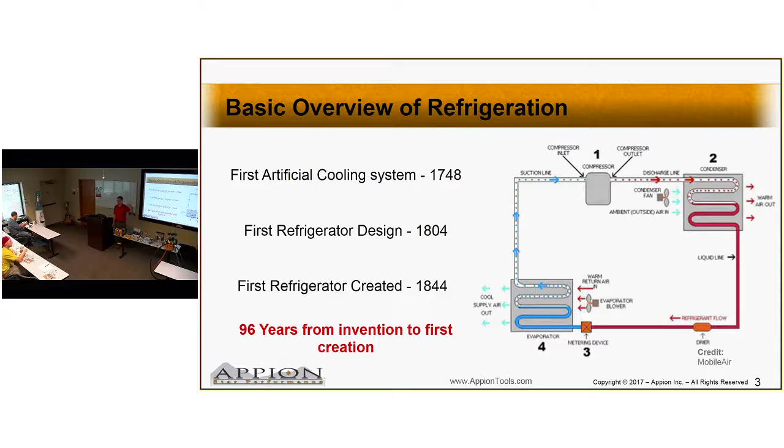So, are you guys familiar with the R22 phase out? CFCs, HCFCs, you guys heard one or two things about this, it's been in the news, the president used to talk about it. You guys buying R22? By the pallet. How much is it, $700 a jug? There are areas, California, that will be over $1,000. They were already $1,000 this year. With the phase out, it's going to become harder and harder to get.

We need to be familiar with this, but you guys are pretty familiar with this already, right? So we can skip this. Yeah, so we'll jump right into it now.

All right, so we always start with, why do we recover? What are the three primary reasons? Not producing it anymore. Required by law, there we go. I believe in giving answers, so you guys can shout out the answers. It is required by law, the Montreal Protocol. We all have our 608s.

Did you guys hear about the guy two years ago now? Got 31 months in federal prison for venting refrigerant, $10,000 fine, 31 months federal. It's a federal crime. It wasn't about how much — it was the fact that he decided to cut a line on top of the roof in front of five police officers. That's something not recommended. That is a true story, it was in the ACHR News.

Yes, it is illegal because we know about that — second reason?

There we go, you can say it louder. Say it again. Environmental, yeah, we're all about the ozone depletion. You can't read it? We'll read it for you. Don't worry, we'll have the rest of it right.

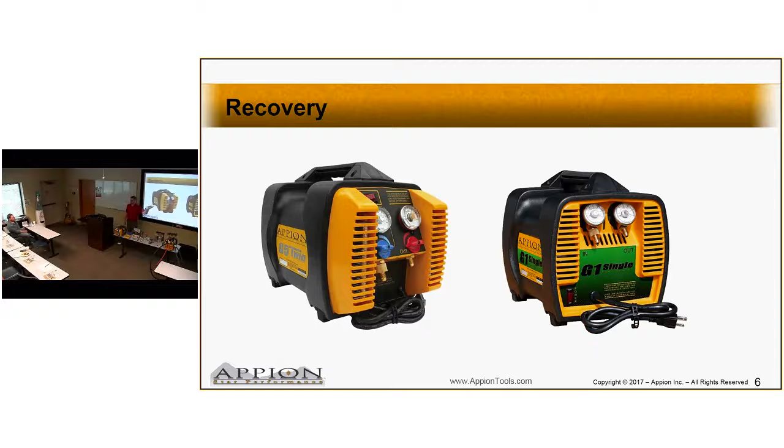This is the last time I'll ever mention the G1 single because it has no bearing on you guys whatsoever. Personally, I don't even like talking about it because it is about a quarter the speed of the G5 now. So it is green, but that's about all I'll say about it.

All right, so when it comes to recovery, how long does it take to recover a job? And it's the correct answer, right? I always get worried and say, oh, I can recover a job in an hour, right? Every job, no matter what? You guys ever talk to guys like that? So, somebody has, all right.

So when it comes to recovery, everything is dictated by this equation. This is called the mass flow rate equation. When we optimize the mass flow rate equation, we can maximize the speed of the recovery on a job. So all this means is it's the density of the refrigerant that we're recovering times the cross-sectional area of the hose, and the velocity at which the machine allows us to pump it.

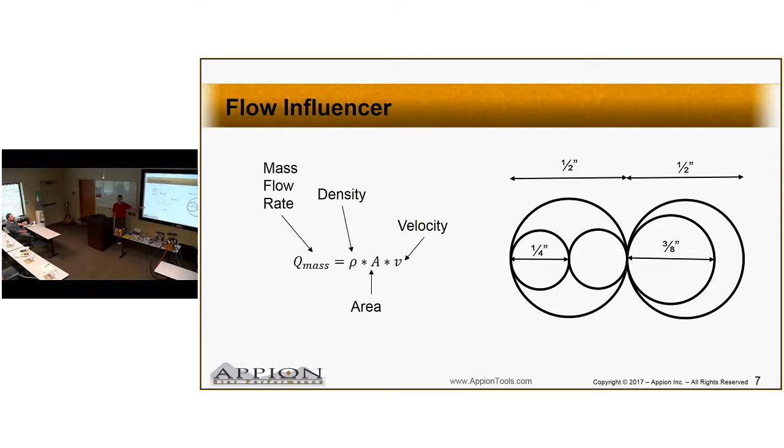Right? Makes sense? We're all familiar with the cross-sectional area, and this is just to help you guys jog your memory. So we're going to walk through this equation, and we maximize this equation to maximize the speed overall. That's the way we can best practice recovering refrigerant as fast as possible.

So we'll start with density, we'll walk through this one at a time. Liquid refrigerant R410A is anywhere between 100 to 300 times more dense than vapor refrigerant. For R410A, we're looking at a difference between 64 pounds per cubic foot and 0.2 pounds per cubic foot. So if you can recover 1 cubic foot, would you rather recover liquid or vapor? Why? Because we can move more of it at once, right?

So right now, are you guys recovering refrigerant in liquid phase?

Nope, machine's perfect, no issues whatsoever. You guys ever blown the output gauge? Yeah, but you guys have newer machines. Ever heard that the fan would fail? That's kind of the older ones would do that. Yeah, fan would fail. You guys ever notice the tanks get really hot during recovery?

Those are all directly related to each other. Those are the most common issues we run into during the recovery process of the G5 because we're going so fast. What it comes down to is when you have all those things happen, or just one of them, it's an indication you have an input or output restriction, and you're no longer pumping liquid refrigerant in any way, shape, or form.

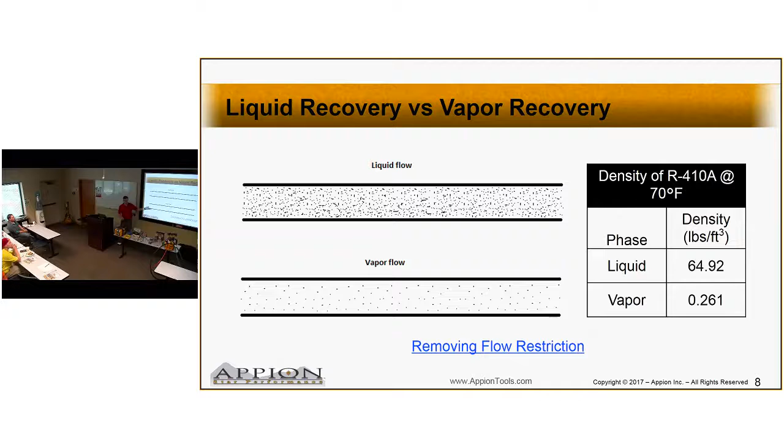So if we're pumping vapor, it's going to slow down the recovery process. But not just that, when you're pumping, what's this? Service valve. So when you guys go on a job, when there's a service valve, I know there's not always one, do you take out your cores before recovery? Yes.

Right now we're looking at about 80% of contractors nationwide do not ever remove their valve cores, ever. They don't remove them for recovery, they don't remove them for evacuation, they don't even remove them for brazing. The number of jobs we've gone on with contractors across the country, we've tried to take out the valve core and found out it's melted in place because it was brazed in.

Yeah, it should be ridiculous, right? But when it comes to recovery, you try to pump through this right here. This is now a fixed orifice expansion device, right? How do you make liquid turn to vapor?

More pressure, more temperature. We all know PV=NRT, right? More pressure means more temperature, more temperature means more pressure. We're going to add more and more refrigerant on top of it, adding more pressure, more temperature, right? These gauges are rated to 700 psi.

We've actually removed a lot of restrictions. We did a test, pumping R410A or high pressure refrigerants through this, not taking this out, with the 80 degrees superheat, we've actually measured up to a 3,000 psi spike internally on the machine. Because it's pumping superheated vapor against itself, it's pushing against the machine, slowing down the recovery process, and damaging your output gauge because they're 700 psi rated. 3,000 psi is not going to be good on a 700 psi machine, right?

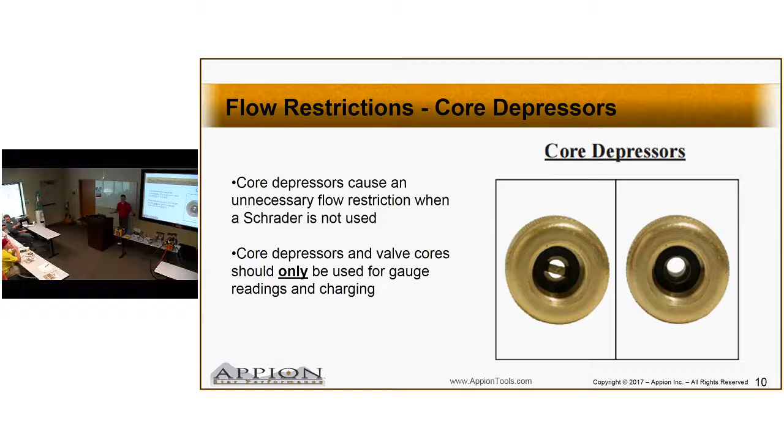You can evacuate a hose real fast. That's what I'll tell you right now. All right, not that hard. So what size hoses are you using when you recover?

Quarter-inch. Right now, about 80% of contractors nationwide use quarter-inch hoses. Quarter-inch hoses, more often than not, will have something on the side of it that starts with a C. You know what that is? It's what describes the hose.

Charging, right? They're all called charging hoses. Quarter-inch hoses are designed for one thing only. What is that? Charging, right. A quarter-inch hose is a capillary tube. Capillary tube is actually an expansion device. They're not nearly as pronounced as the Schrader core left in, but they still are an expansion device. They're designed to resist and regulate flow during charging.

Do we want to resist and regulate flow during recovery? No, right? We want to have maximum flow. So we know by that equation, a larger cross-sectional area should increase our flow, right? However, we have our half-inch hoses here. The half-inch hose is actually slower than a 3/8 hose during recovery.

It won't get any faster. So we do get a slight restriction in flow with the 1/4-inch fittings. We have the 1/4-inch fittings because it's more or less industry standard. However, when we think that you don't get any benefit from it because there's 1/4-inch fittings, that's because as humans we're used to dealing with one fluid more than any other.

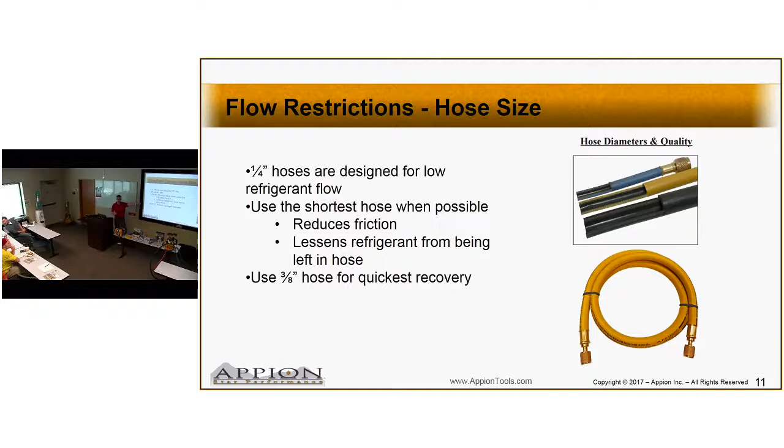We can get into the dark, dirty word of push-pull here in a second.

February 2016, we got reevaluated by UL. For our 410A systems, we can pump at 17.2 pounds per minute direct liquid rate. We talked about how we want the machine to have liquid - if we move liquid, we move liquid faster, right? Are you guys currently getting that type of speed?

Maybe, since we have the G5 twin. But that's for liquid - if we're not pumping liquid, you're not getting that speed. Vapor, more or less, doesn't change too much because we're limited by the density of the vapor. We can do liquid, we can do vapor. Have you guys ever heard that recovery machines can't pump liquid?

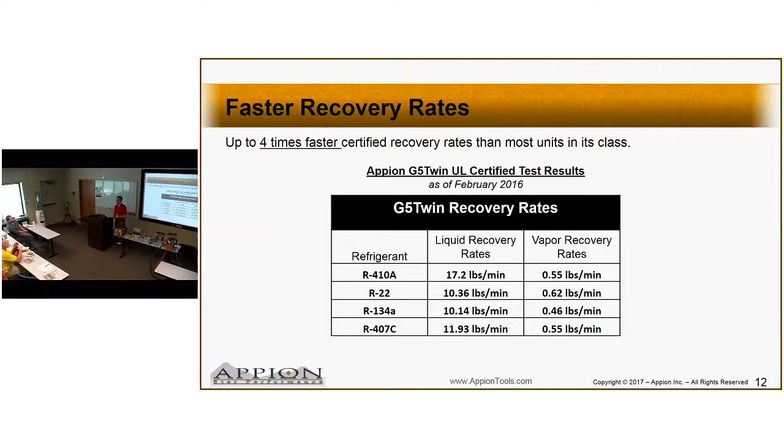It's in textbooks sometimes - some teachers will train it that way. Well, what it comes down to is the original design. Our founder was also the founder of what's called Promax, or what used to be called Promax. I don't know if they're still around. You guys know what Promax is - the blue machines for recovery? They were the first portable recovery machine that didn't blow up.

There's a fun story behind that one. I'll tell you that later.

So have you guys ever used the ones before they were portable, or ever seen one in a museum? Some shops still have one floating around - about 350 pounds on a cart. You guys ever seen one of those? Yours didn't have a cart - you had to have 5 guys lift it up. How do you get that on top of the roof?

How do you get a 350-pound machine on top of the roof? Apprentices, cranes, a lot of guys will say a 600-foot hose. We know that's going to be a little slow, right? So we know that if the machine's not portable - and that's probably the correct answer, sadly - people aren't going to recover. They're going to skip the job because it's too much effort. We're not going to do it. So we had to make the machine portable. Where's most of the weight on a recovery machine?

The motor's the largest weight, so to get it portable, we had to put a smaller horsepower motor in it. How do you design for a smaller horsepower motor?

You make it do less work, right? So originally, the design that he made was to fill the crankcase with the refrigerant. The refrigerant's now going to have a positive pressure on the backside. That's going to build up to allow a pressure differential across the piston, which means we have a smaller horsepower motor because it has to do less work, since we're using the refrigerant to pump forwards. We're allowing the machine to be smaller because we load the work by making refrigerant work for us.

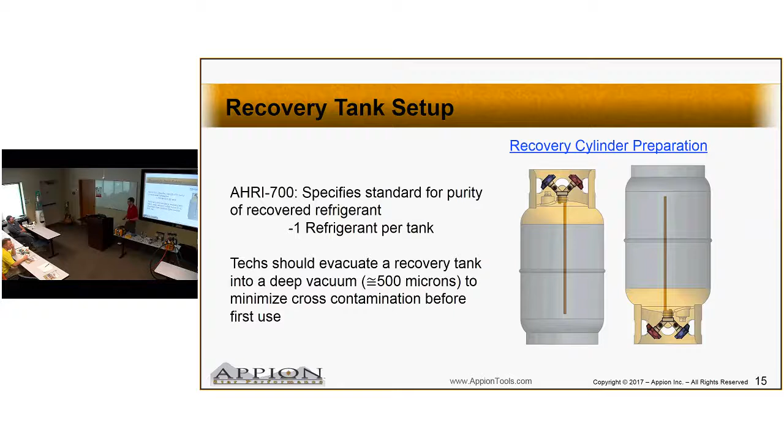So this is what's called our manifold-less recovery technique. This is - we're going to show... wow, brings me back to the 1990s.

Alright, so we say we do not recommend manifolds, right? Because they increase head pressure. So how do you get from both sides of the system at the same time? So what was on the side of the valve core tool? There's a valve core in there, right? What do you think you can use to remove that valve core? Another valve core remover tool, right?

So this technique uses 3 valve core tools, 2 4-foot hoses, and 1 6-foot hose. What it's designed to do is minimize the restrictions to maximize your recovery technique. Again, we're talking about small systems - the idea can be transferred over later.

So what we found is you hook up your liquid straight to core, core out. You're going to have your 6-foot hose strung from your liquid straight to the input of your machine. You're going to have another core tool - it's going to bridge from there, right? You're going to blank it off from the liquid. A 4-foot hose then bridges to your vapor port with the core removed, obviously, and then you can put your compound gauge directly onto the side of your vapor port.

Have these ones purged and closed. You always want to have all your hoses purged before you recover.

You're going to start recovering your liquid first. You're going to watch your scale and your compound gauge. Once you start pumping vapor, it is noticeably slower, right? We know that we're going 17 pounds per minute and we're seeing it just stream right by, and all of a sudden it's getting, we're going 1 pound, 2 pound, 3 pound, 1.1, 1.2, right? It's usually that pronounced. Time to switch over to the vapor side.

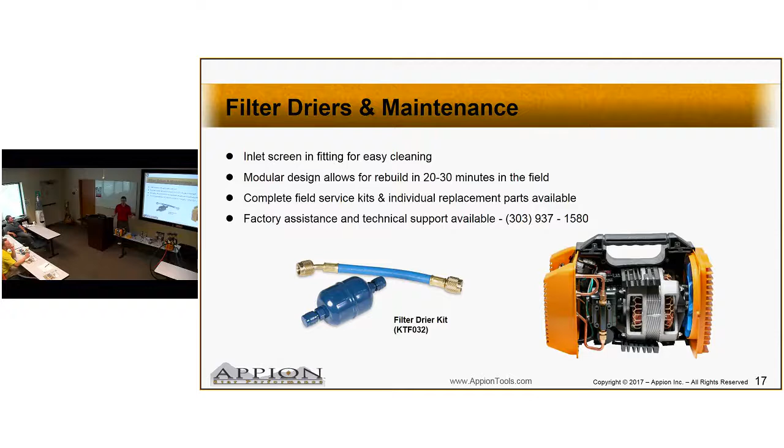So yes, you can fully field-service a G5 Twin in about 20 to 30 minutes. What it ends up being is the only thing that really gets worn out are these O-rings and seals. O-rings and seals are usually designed to eventually wear out. Usually we see between 5 to 10 years with filter drier use and constant best practice. These can go without being replaced.

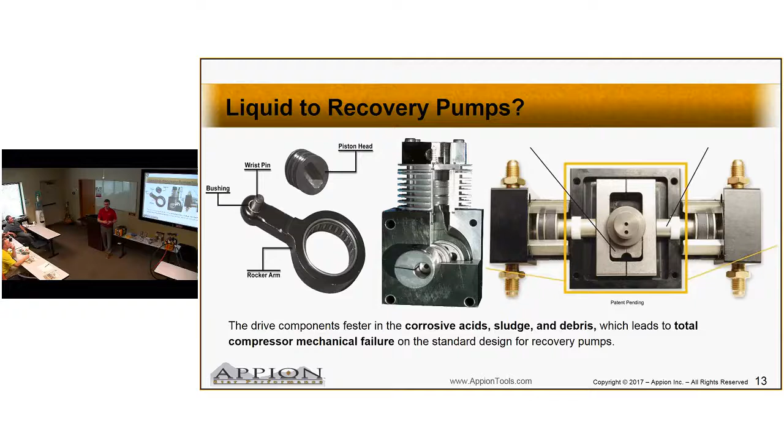What happens if you're doing a unit and it has a little piece of copper in it that nicks your seal? It's not going to seal very well, right? It's been damaged, that's when you replace the seal. You're just replacing these two seals, this is completely isolated, you're not worried about that. And these two seals, how long did it take you to do the first one, Jim? An hour and a half. Jim's slower on the screwdrivers. Usually we're talking about 45 minutes for your first one, and you do it once. Who's got the cutaway? You open it up, that's what you see, you won't ever see that center part. It falls apart real easy, or takes apart real easy.

Anyway, do you guys have any questions? Made sense? Yes. Yeah, perfect.

So we have two options here. I can either show you guys real fast how to do a bench test to see whether or not you need to repair your machine, or just jump right into vacuum. I'd say do a bench test.

All right, so we have an extension cord right here. Everyone come on up, we'll do this real fast, get you guys moving, get that chicken up and around. I need more chicken. I know. Yeah.

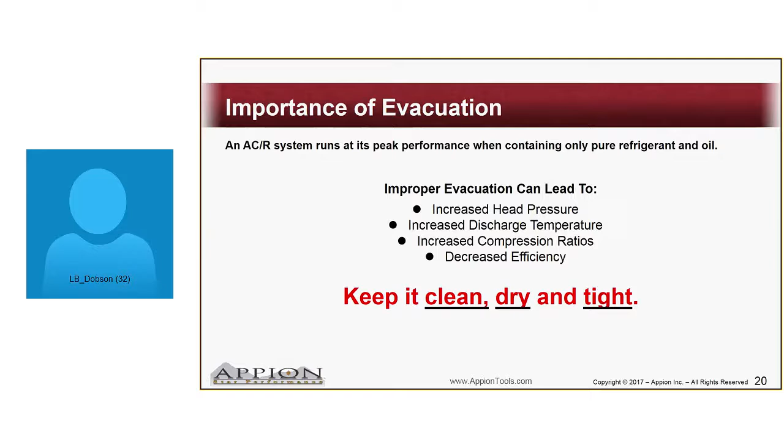Depends, right? The answer is always it depends. Why do we evacuate a system? Because the government told me to, right? What happens when we don't evacuate a system? Work back for free.

Exactly, yeah. So if we don't evacuate a system, we're going to leave condensables in the system, non-condensables. Non-condensables is going to increase your head pressure, discharge temperature, blah blah blah, right? We can all read. What happens when you leave something called moisture in there?

Right, you're going to build acid up and all that stuff. So they did a test - the Department of Energy did a test where they didn't evacuate a system and charged it fully correctly. They found that if you didn't evacuate a system from atmosphere at standard conditions, you had an average of a 15% energy drop of a system. 15%. They added 20 psi of nitrogen in the system, a non-condensable, and they found that it had a 45% drop in energy efficiency.

Now you should not have 20 psi of nitrogen ever in a system when you start evacuating, but it does go to show - if you're trying to compress a non-condensable into a liquid, as we know it's non-condensable, it's going to drop the efficiency of that system. You're going to have an angry homeowner because it's now costing them more to operate, right?

So evacuation is degassing and dehydrating. So you're removing non-condensables and moisture from a system before we put refrigerant in.

You guys ever deal with pinhole leaks? One or two, right? Go to a system, where's it losing refrigerant from? Okay, usually pinhole leaks. You guys ever put a hard start kit on a compressor? You guys ever had a failed compressor? Why do those happen? Guesses? They're usually related.

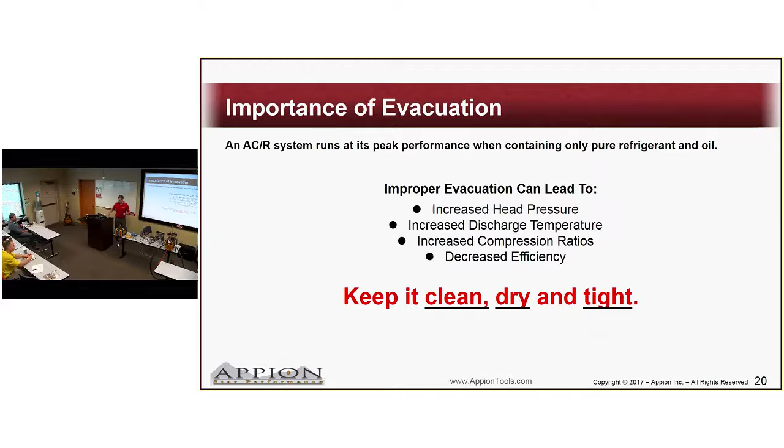So what happens when you don't remove all the moisture from the system? Someone said it earlier - acid, right? Moisture plus refrigerant will either make you hydrochloric or hydrofluoric acid, depending on the type of refrigerant we're dealing with. At standard conditions, 50 feet of quarter-inch copper line will have about half a cup of water in it. Is that enough moisture, do you think, to make some acid? Sure. Where are these pinhole leaks coming from?

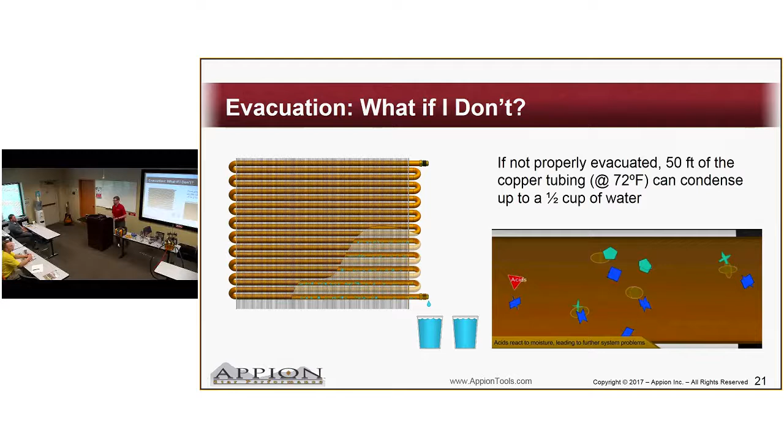We have hydrochloric acid running around in a cycle, corroding away the copper on the line, which eventually is going to make it so thin that you have a small leak that develops, right? Pinhole leak. Where's the copper going to go? It goes to this system and gets deposited on the hottest part of the system, the crankcase of the compressor. You guys ever taken apart a failed compressor?

More often than not, you see a lot of copper in there. There's not supposed to be any copper in here. What happens is with moisture in the system, you make acid. The acid is going to strip away the copper. Pinhole leaks develop, and the copper is going to go around the system and get deposited on the crankcase of the compressor. As it's cycling through, it's going to build up more and more copper. Eventually, it's going to start seizing up on you. That's where we put the hard start kit in. A hard start kit usually does an extra little kick for us to break that initial friction that we've developed because now we've had less tolerance due to the copper buildup. Make sense? That's eventually why we need it.

You guys ever heard that moisture will freeze and clog the TXV valve with ice crystals? Well, that's not true. Some people out there think refrigerant makes things cold, therefore if you put moisture in it, you make ice crystals. Not true. You make acid instead. The acid will actually destroy the oil, the POE oils, whatever you might have in there, which makes sludge, and that's what ends up clogging up your TXV valves.

You guys ever seen the failed TXVs, TEVs? Even fixed orifices, they have all that stuff in it. That's usually the sludge that's developed from the acid. The acid is coming from the moisture left in the system, and the system is operating at less efficiency. It's going to break, and we're going to get an angry callback sometimes, depending on how much moisture, how much humidity is outside, all that stuff.

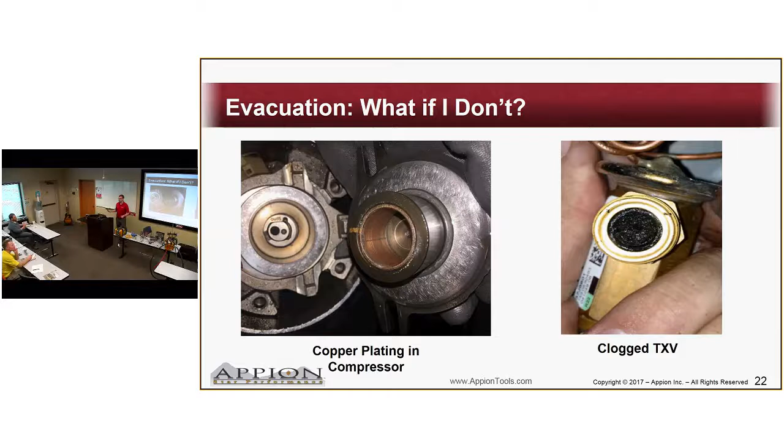So why don't people properly evacuate if we have all these negative effects that can happen without properly evacuating? Why don't you do it? It takes too long, right? You guys ever heard that it takes an hour to do a system? We've heard it - oh, it's a residential system, let it run for an hour or 24 hours. Big system, 24 hours, we'll just let it run constantly, we'll be fine. Is that done? No. So most people are trying to find ways to make it faster.

So what Appion does is we teach, preach, and show what's called the COF methodology that all our stuff is built around. COF stands for what? Someone knows how to read the screen - yes, I'm going to ask you that a few times. COF is clean oil full flow. This works for any vacuum pump in our industry, any rotary vane vacuum pump, which is 99.9% of industry vacuum pumps. This will increase the speed of any pump. We are designed to maximize this.

So we're going to start with flow. What is this? Right, Schrader cores - same thing, this blocks about 90% of your flow. What size vacuum pumps are you currently using to evacuate a system? Somewhere between a 5 and a 12, some of that range. Are you taking out your Schrader cores before you evacuate? 80% of contractors right now never remove the Schrader cores, remember. So if you do not take your Schrader core out before you evacuate, this will turn your pump into approximately a 0.2 CFM vacuum pump.

We have a German rep. He says it's kind of like, on Friday night, someone passes you a beer. So if they pass you a beer, put a coffee stirrer in - it says you can only drink that beer through that coffee stirrer. Again, don't say it out loud, but yes, you will not be a happy camper.

It does not matter how big your pump is. If you don't give it full flow, your pump will effectively become much less, because that's the flow we can actually see. Don't remove the Schrader core - it doesn't matter anything else that you do, your pump is now approximately a 0.2 CFM vacuum pump. It's going to take a while. So what do we do to remove Schrader cores?

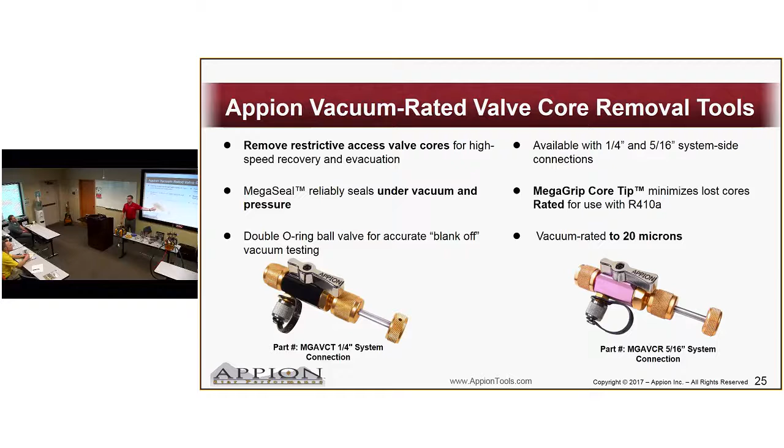So we teach and preach the COF methodology - clean oil, full flow. For full flow, we want you to estimate how much flow is going to your vacuum pump. So we do what's called the 1, 2, 3 rule. What size hoses are you guys currently using for your vacuum?

3/8. Is that 2 1/4-inch hoses up to a manifold down to a 3/8? Yes, right? So that is a 1/4-inch hose - you're pumping through 2 1/4s. You've noticed it is faster still than a 1/4-inch all the way through. We do not recommend manifolds - the longer the length, the slower the vacuum. So we're not talking about manifolds here.

We're just talking about if you don't take the Schrader core out, your pump is now a 0.2 CFM pump. So we're taking the core out first and foremost. If you use a 1/4-inch hose, no manifold, from the system to your vacuum pump, regardless of the size of your pump, it's now approximately a 1 CFM pump - that's how much flow can go through during vacuum. If you're using a 3/8 hose straight from the system to your pump, it's now a 2 CFM vacuum pump. And if you're using a 1/2-inch hose straight from the system to your pump, it's now a... 1, 2, 3 - 1/4, 3/8, 1/2, right?

This is a fast way to estimate how much flow is getting to your vacuum pump. So this way we can say if we have 2 1/2-inch hoses with Schrader cores removed, how much flow are we getting to our vacuum pump? 3 and 3, 6, right? So 2 3/8 hoses, 4, 2 1/2-inch hoses with the Schrader cores say in 0.2, right? So this is a quick down and dirty way to estimate how much flow I'm going to my vacuum pump to see how fast my vacuum pump is going to be able to go. Does this make sense? Nice and easy?

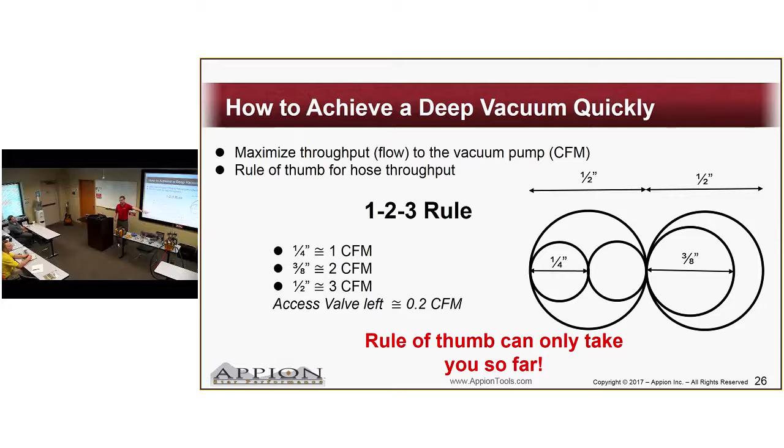When you evacuate a system, you want to use a short length, large diameter hose for maximum flow to your vacuum pump. Now don't get caught up on this, right? The reason why we have the 1, 2, 3 rule is because you guys can add 3 plus 3, right? Usually, I know Friday at 7 o'clock, I might not be able to add 3 plus 3 either. But we know that rule of thumb just means it only can take you so far. There's a whole science behind it.

A lot of guys will ask us, what's the point of a 1/2-inch hose if there's a 1/4-inch fitting on the end, right? The service port's only so big, right? What it comes down to is each hose has its own conductance that you can calculate. You can then add it together and you actually get the total amount of flow. We want to have as much flow to the vacuum pump to increase our vacuum speed. But we can just estimate it really quickly with 1, 2, 3, right?

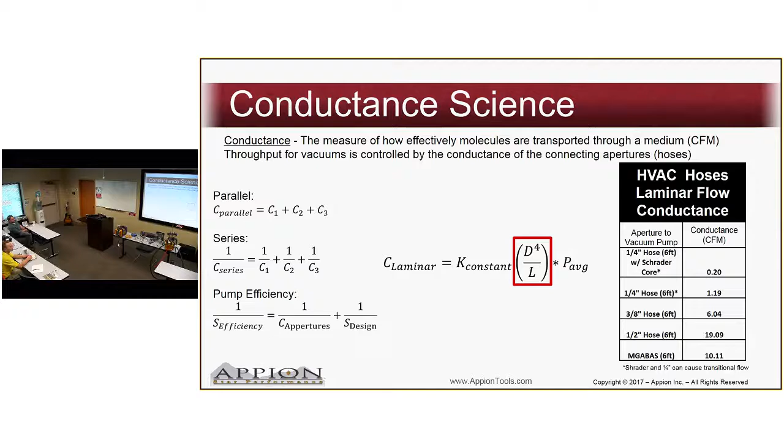So this is the most common way in the industry people set up a vacuum pump, right? Schrader cores left in, 1/4-inch hose up to a manifold, down to a 1/4-inch hose. What is that? 2 6-foots makes 12 feet total length. Schrader cores left in. By the 1, 2, 3 rule, how much flow? 0.2, right? If you go through all the math with parallel and series and conductance and so on, you end up with a 0.29 CFM effective vacuum pump.

Why is it taking so long to evacuate a system? Because you're trying to drink beer through a coffee stirrer, right?

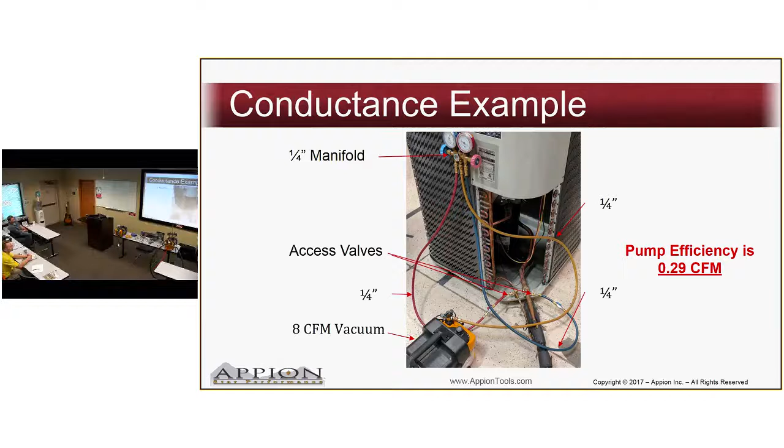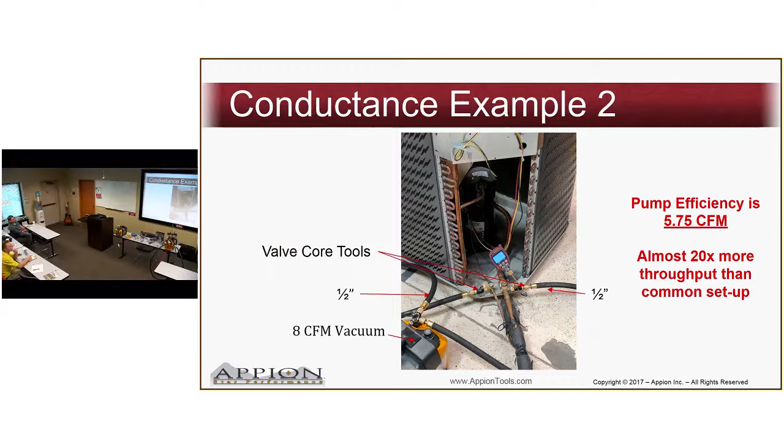This is actually the test that we did in our factory. We had a 10-ton system, Schrader cores left in, 1/4-inch hose. We're using the TEZ8, an 8 CFM pump, right? We pulled it down 5 times and took an average because time and vacuum don't correlate with each other, right? We found that it took on average 40 minutes to get 500 microns in a 10-ton system.

Sounds about right? Took the Schrader core out using the vacuum-rated Schrader core tool. Cut our time in half on average to 19 minutes. We went from that 1/4-inch hose to the half-inch hose, Schrader core removed. On average, it took 3 minutes to evacuate a 10-ton system down to 500 microns.

Have you ever evacuated a system that fast? Will you ever evacuate a system that fast? Probably not. We're in Denver, Colorado.

Denver, Colorado is pretty clean and dry, but your system needs to be clean, dry, and tight. Colorado is not clean, dry, and tight. Anyway, so it's a clean system, it's a dry system. It was brazed with nitrogen, and there's not much moisture in the air.

We had previously evacuated it down to 500, 400 microns, so we're not dealing with all that stuff. Vacuum and time don't directly correlate. The amount of flow that goes through your vacuum pump will increase the effectiveness of your vacuum pump. The more effective your vacuum pump is, the faster your evacuation will become. We're talking about increased effectiveness.

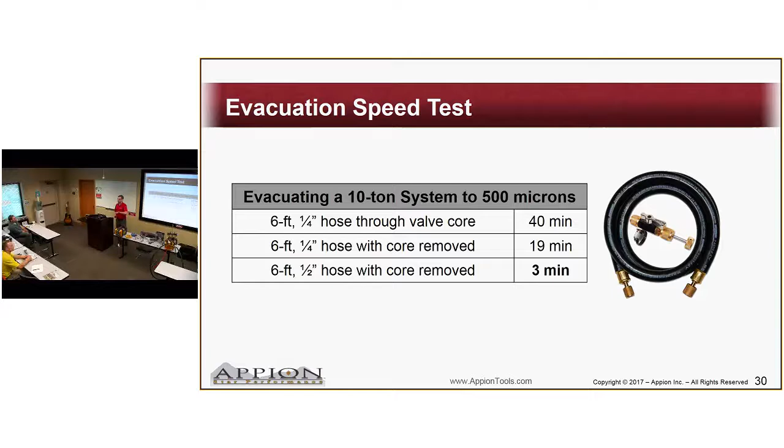So, some examples. This was a guy actually using the TEZ8. He had 50 feet of copper line, 1/4-inch copper line, with schrader cores left in.

So he said this was his manifold. The reason why he had this is because now he can put it anywhere he wants. We know the equation says short length, large diameter. Do you think he's getting much flow to his vacuum pump? If you actually go through the math, he ends up with a 0.09 CFM vacuum pump effective.

That guy carried that around? Yeah, he bundled it up, put it in his truck. He told us that the TEZ8's no better than any other vacuum pump. We came out, this is what we saw: schrader cores left in. By the 1, 2, 3 rule, how much flow would you estimate? 0.2, right? Not the same, but pretty close.

So we came out and said, listen, short length, large diameter, more flow, full flow for maximum effectiveness. So we hooked up the TEZ8, same pump. It went from 24 hours down to 2 hours.

We have 1, 2, 3, 4, 5 half-inch hoses. By the 1, 2, 3 rule, how much flow is that? Times 3, 15, right? We can estimate 15 CFM. That is not true. Actually, this one ends up being about 6.13 CFM when you actually go through all the math. There's a slight discrepancy between the 1, 2, 3 rule and actual math, and what that is, you can never be greater than the CFM of the pump. That's where the pump CFM comes into play.

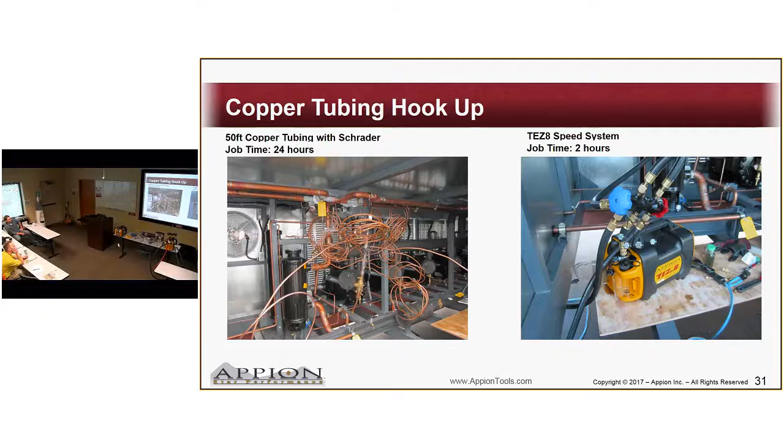That's why it's okay to use our hoses for evacuation, because they're designed for evacuation. Does that make sense? All right, we'll do another quick example here.

So we came in with 1, 2, 3 half-inch hoses, which gives us what? 3 times 3 is 9, right? So we can estimate 9 CFM. We did all 4 servers in 7 hours. More flow, the faster you go, right? We've now had these hooked up straight to the pump, and we get increased effectiveness. I think this one ends up being about 6.07 CFM when you do the full math, and this one's 6.33. So more flow, the faster you'll go.

So last one, I swear guys. This is actually in Indiana, the Hussmann plant, refrigeration cycles. So they were taking 23 hours to pull the system down in the factory, brand new. We pulled it down in 2 hours. We have 1, 2, 3, 4 half-inch hoses and 1 3/8 hose.

How much flow are we getting for the 1, 2, 3 rule? 14, right? We can estimate it, we know it's not exactly true, but we know more flow, the faster you go - more hoses, faster evacuation. Make sense?

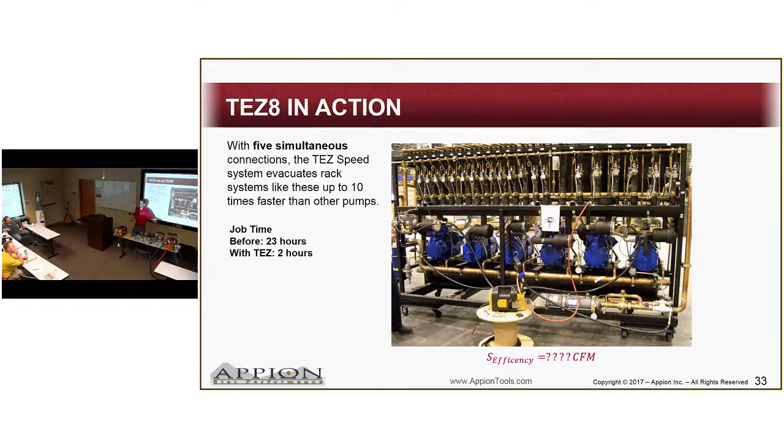Your manifold has a ton of- yeah, this is our old manifold, but the one you have doesn't have gauges on it, so you have tons of ports to go into. This is the inside of that without an analog manifold - it's the same thing. We discontinued our analog manifold because you can't maintain the accuracy of analog manifolds. So this is what our vacuum manifold kit is, that's actually what this is. This is called our Speed Kit V.

I heard you guys were fighting over one previously. These are essentially 2 half-inch hoses, 2 Schrader core tools. So these are our basic kits - this is 1 half-inch hose and 1 core tool. The Megaflow kit comes with 2 half-inch hoses, 2 core tools, 2 3/8 hoses, and then the half-inch bore manifold. Everything is vacuum certified down to 20 microns.

So it makes it so that you can put more hoses on a system, and the more hoses you put on a system, the faster you evacuate. We try to make a starter set, it comes in this carrying case right here. Everything's half-inch, vacuum certified, more hoses, faster flow. You guys can look at that and ask any questions you want.

Okay, have you used yours, Matt? Yeah, you did? Yeah, so we got a couple of those floating around service, and I think for special projects, those guys doing those big VRF jobs - yeah, that should be on everybody's truck. That's what we're doing, pulling 100.

At minimum, we usually recommend having at least 1 or 2 of the basic kits, that's just a bit more cost effective when you look at the total for larger jobs. If you guys are doing VRV, VRFs that only have like 2 service ports, you really don't need the MegaFlow kit because this has 4 hoses. If you only have 2 service ports, you don't need the extra 2 hoses. So it kind of comes down to you to balance it out.

We have this in both 1/4 inch and 5/16. I don't think we have that one in 5/16 yet, but again, it works on any vacuum pump. What this comes down to, if you don't have the TEZ, it comes with these 2 adapter hoses, so you can put our manifold set onto another vacuum pump with a 3/8 connector. You can get all the hoses on your pump because most pumps don't have this many connections you can put on it.

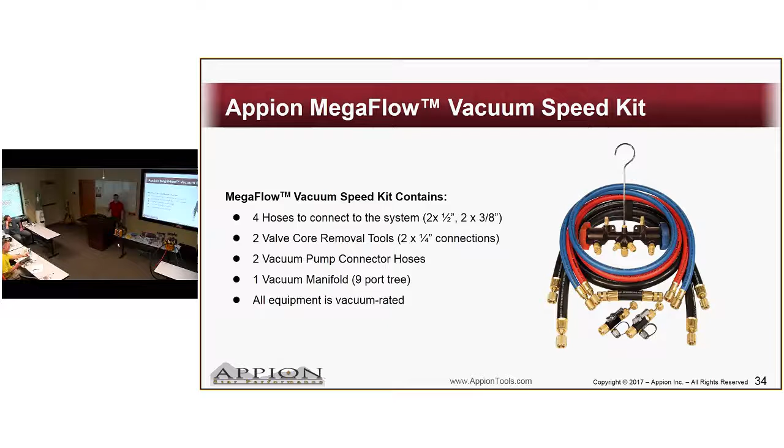Usually we're talking about going so much faster, and we have this nice thing called humidity here in Washington, right? Have you guys ever heard that if you pull a vacuum too quickly, you'll freeze the system? Yep, it's a fact. Can you freeze water with a vacuum pump? Oh yeah, you can. Right now you can pull up videos and show me where you freeze water with a vacuum pump. How do you freeze water with a vacuum pump?

Science. These are the two scientific terms we're going to go over real fast. It's called the delta H - this is the enthalpy change. So if you have about 1 inch or 1/2 inch of standing water and you're pulling a vacuum on it, it's going to start pulling the vapor off of it. Each vapor molecule you pull away will take a little heat with it, which makes the remaining standing water turn a little colder.

Next we have what's called the Joule's effect. You guys ever heard what the Joule's effect is? This is a fancy way to cool down soup. How do you cool down hot soup? You blow on it, right? Cools it down, same overall principle. As you start pulling away these vapor molecules, the rest of the vapor molecules that are still there will expand rapidly, and essentially you're cooling down hot soup. These two things working in conjunction with each other can eventually cause the water to freeze - so Joule's effect, and then we have the delta H.

However, to do this, you need right about 1/2 inch or 1 inch of standing water in the system - just about right there. Because what happens when you have less? It instantly boils off. If you have too much, the mass of the water will prevent it from freezing. So you need to have that right about the same, 1/2 inch to 1 inch of standing water. So can you freeze water with a vacuum pump? Yes. Is it likely? If you do, the question should be, why is there 1/2 inch of standing water in your system?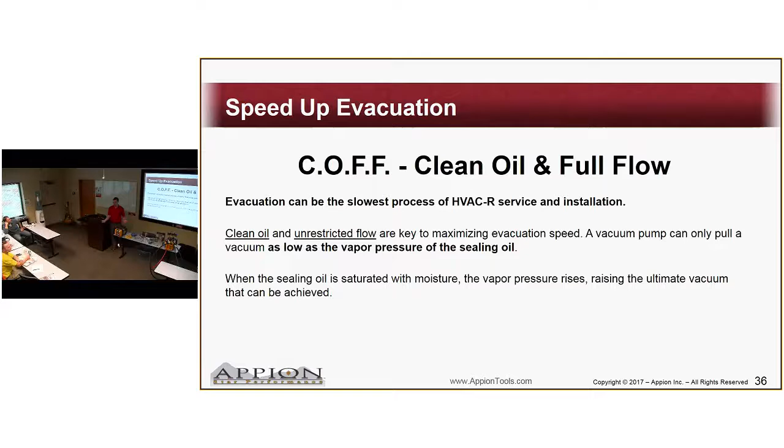So how often do you guys change the vacuum pump oil on your vacuum pumps? Every time? 2 or 3 times during evacuation.

So what if I tell you, nationwide, the 3 most common answers when I ask contractors - regardless of refrigeration, residential, commercial, whatever it is - how often do you change your vacuum pump oil? The 3 most common answers: Number 1, they'll laugh, right? Silly Appion guy doesn't know that we're not changing our oil, right? Happens every time. Number 2, usually the next common answer is, when it falls over in my truck, I gotta refill it, gotta put new oil on it, right? Number 3, when the guy at the parts house buys you a hot dog - yep, counter day, you change the oil for me.

How often should we change our oil? Have you guys heard the rule of thumb - change your oil after every use? Right? We've all heard that? What if I tell you that's wrong?

We've all heard that, right? Change your oil after every use. What's the use though? By that rule of thumb, the guy working on a 2.5 ton system and the guy working on a 5,000 ton chiller use the exact same amount of vacuum pump oil. Does that make sense? No. Change your oil after every use is for vacuum pump maintenance, it has nothing to do with operations. How often should you change your oil? When you need to.

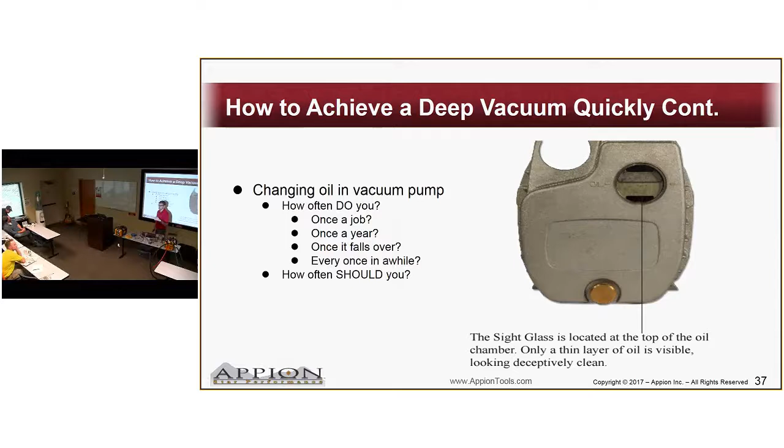A lot of guys say, well, I just use the sight glass to tell when I need to change my oil. What's the sight glass for? Oil level only. The sight glass is at the top, contaminants go to the bottom. This is not going to tell you what your oil conditions look like. Usually there's a piece of folded metal in there that's going to tell you where your oil level is easier—it's not going to say what your oil actually looks like.

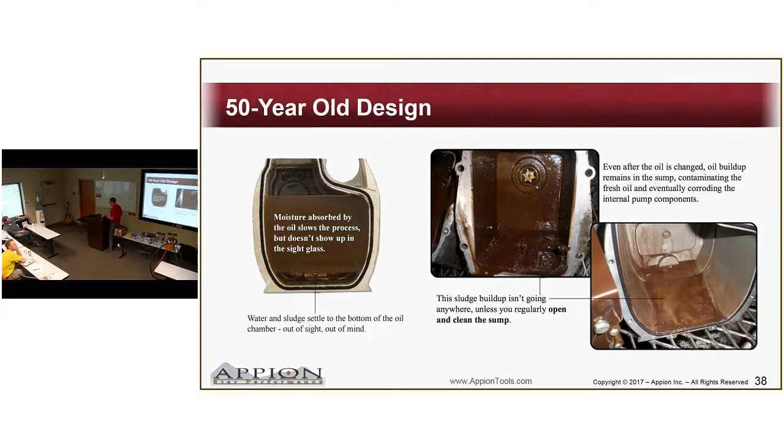Make sense? So Appion says, well, we know COFF—clean oil, full flow—is important. Why is it important? Full flow makes your pump more efficient. And when the pump sealing on a rotary vane vacuum pump—remember, 99.9% of pumps in our industry are rotary vane vacuum pumps, these are named by engineers—what do you think a rotary vane vacuum pump is going to have? A rotary vane, they're not very creative when it comes to naming things, right?

The oil will go along the wall, so when the vane hits it, it creates a seal so it can whisk away the contaminants from the system. Make sense? So we need that sealing ability of the oil to be able to create the vacuum. The seal is making our vacuum.

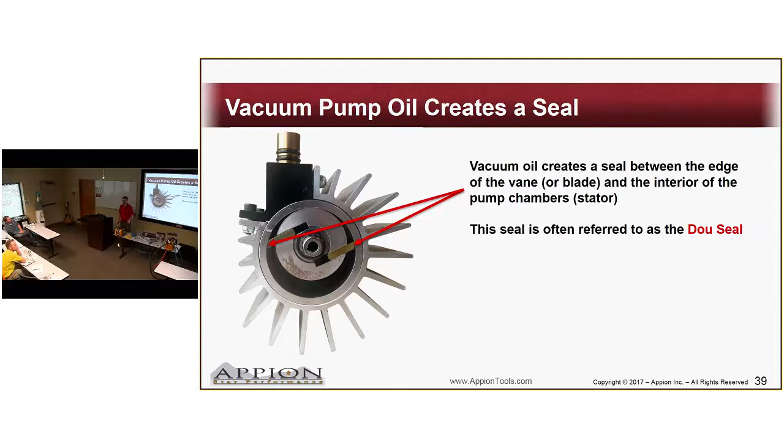But you guys know what vapor pressure is? Ever heard that term before? Vapor pressure—if you want to visualize it, think about a lake really early in the morning. Sometimes you get that mist rising off of it. That mist is the vapor of the water rising off the water. All liquids will naturally have a vapor pressure, some solids do too, it's interesting reading. So that vapor pressure—you can measure the pressure as it's trying to exert away from the liquid.

So the oil, which has a low vapor pressure, which allows it to be a good sealing oil, starts off clean, and then you put contaminants into the oil. You put more and more contaminants into the oil, you will increase your vapor pressure. You're decreasing its sealing ability because the vapor pressure will actually push the vane away from the wall more and more. When you push the vane away from the wall, you get what's called back leakage. The contaminants will now slip by. You cannot get a vacuum below what the vapor pressure of your oil will allow.

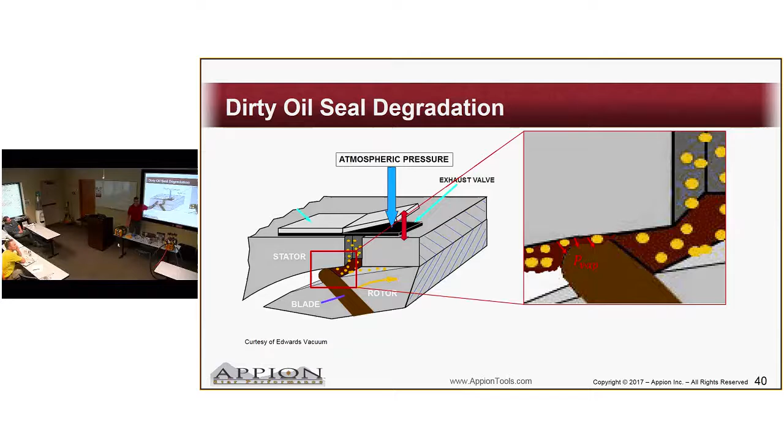So that's why COFF, clean oil full flow, is all about keeping clean oil in your pump so it can create a good seal. You guys seen the TEZ8 before? Right, we have one right here, so you've all seen it. So its primary feature, the biggest benefit over anyone else's pump, is what?

Change my oil, pop it out, put a new one in, away we go. Simple, right? You keep clean oil in the pump, it becomes exponentially faster because we have a greater seal. The better the seal, the more contaminants you can pull out quickly. When you burp it, you can see it pulls down a little more each time, less load on it. The cleaner the oil, the faster it pulls down.

Think about the oil kind of like a paper towel. If someone spills water on the floor, they hand you a paper towel, right? You start picking it up. What happens once that paper towel is saturated? It doesn't pick up much anymore. So what do you do?

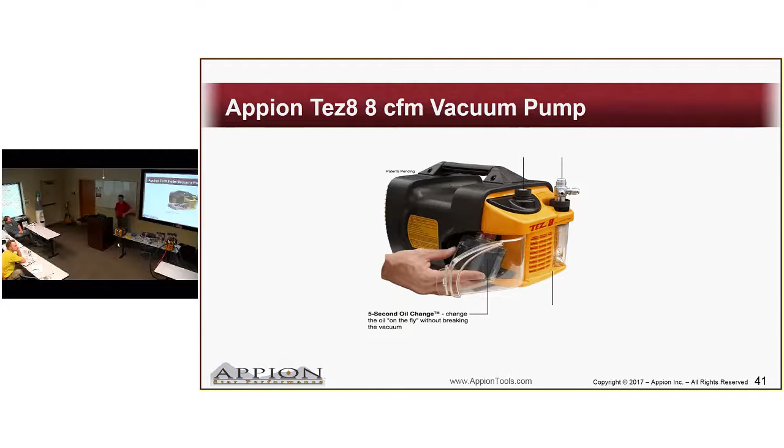Clean oil, full flow, faster. That's why we have these little cartridge things, right? We pass around that cartridge - see the cartridge? This is a nice, easy way to change it. But there's also one more thing - this is a visual diagnostic tool. We're adding one more tool to your tool belt.

So do you guys braze with nitrogen? Over half the contractors in the United States do not use nitrogen. What happens when you don't braze with nitrogen? You know that black stuff on the inside? That's called cupric oxide - the fancy word of the day. So if you do not braze with nitrogen, you build up the nice black stuff - cupric oxide.

So what we want is for you to braze with nitrogen. Copper is Cu - I'll call it cupric. It's the end of the day, come on guys.

If you do not braze with nitrogen, you get this black stuff build up, and you're going to see that in your oil when you remove it. We pull it down and watch your oil turn black. So we can tell when we go on a job - we pull the vacuum pump, turn it on, it starts turning black, and we turn to the guy standing next to his boss and say, hey, are you brazing with nitrogen? Every time, never fails. We usually have a distributor right next to us and ask, do you buy nitrogen from this guy? They say oh yeah, yeah. How much nitrogen do they buy from you a year?

A tank, for how many guys? Twenty. Are you using nitrogen? No. That's usually how it ends up going. So we know over half of them aren't doing it, and we can visually see it because we watch it pull out the cupric oxide into the oil.

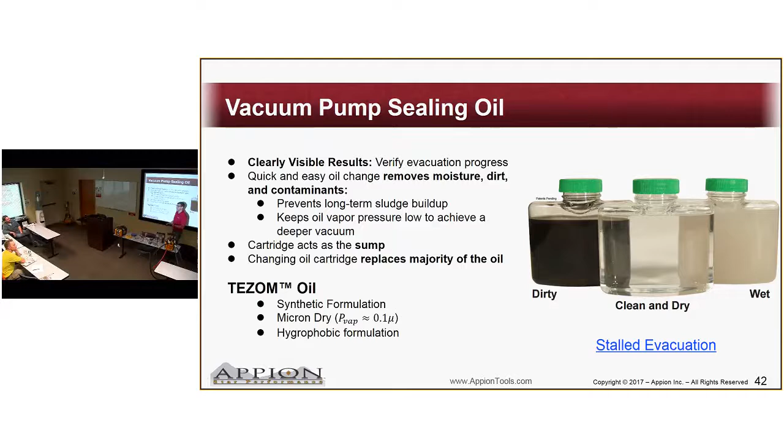If it's really humid outside like this, what happens to the oil? You're going to watch it turn this milky white color - it's getting wet, right? That tells us there's moisture in the system. We can use this as a diagnostic tool.

How many people have those TEZ8s? Travis - we had it, but I gave it to Travis. There's really only one in here? They're ordering them as they come in. They're not supposed to be ordering them now - I thought there were a bunch in Portland, and I've seen a bunch in the tool room, so I figured there were more. Well, everybody stores them in the tool room. So, some examples of this new tool in your tool belt, guys.

What's this? You pull on a system, you watch your oil, and it turns this blackish color. What's that? No nitrogen - that's your cupric oxide, right? You didn't braze with nitrogen. Number 2? Yeah, a lot of moisture in the system, right? Moisture's going to tell you something's going on.

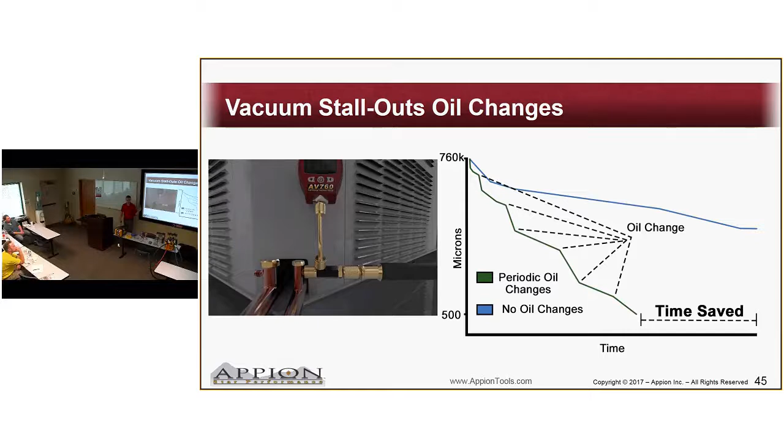So the question then becomes, how do you know when your job is done? What standard do you guys use to tell when your vacuum's done? Say it was 500 microns for...

Okay, so that's close to—I think that's the ESCO group—this 10 to 15, right? Triple stage evac recommended, pulled below 500 to 250 microns, hold for 10 to 15 minutes, right? ASHRAE says to pull to 500 microns.

That's not stringent enough, we do not recommend that one. You guys know what Title 24 is for California? You hear about it—because eventually it's going to make its way to the rest of the country. They say you have to triple stage a vacuum, triple evacuate a system, pull down to 250 microns, and it has to hold for 24 hours.

Yeah, it's California, right? They're going to do their own thing. You do, yeah, Daikin mini splits now—out of the manual, they say for a Daikin system you're supposed to triple evacuate, pull below 500 microns, and it's got to hold below 500 microns for an hour.

So just so you know, Walmart follows Title 24. That's what I've been told. Yeah, right, they're supposed to. LG—so there's various different standards. So which standard do you think we recommend following?

We recommend following whichever standard applies to you. Because you guys are in Washington, right? You follow whatever your boss tells you to go to. You follow whatever your customer asks for. And you follow the hardest standard to get the best results.

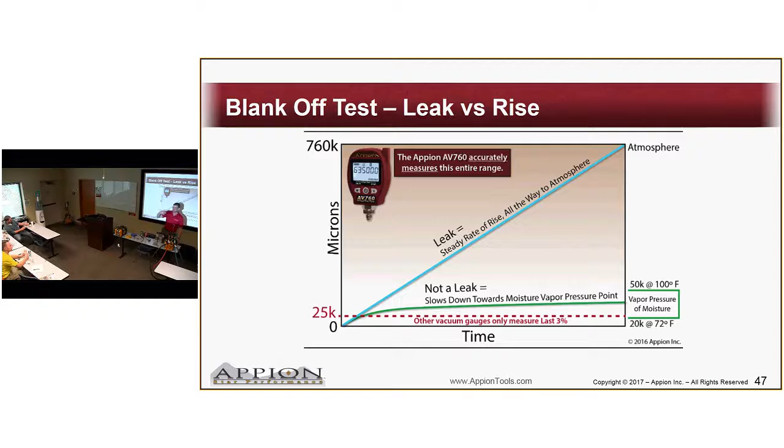You guys ever heard about using compound gauges to measure microns? That's old school, right? We have guys that still like to say, oh, compound gauge, it's a lot cheaper. If you're trying to use an analog gauge to measure microns, this is like measuring an inch with the odometer of your car. The gauge arrow is about 50,000 microns wide. It doesn't have the resolution. You guys know it's the old school way. Analog gauges are not accurate enough to measure microns because they have a lot of built-in errors.

We don't actually recommend analog gauges anymore. We discontinued all analog gauges from our company other than for rough readings, because we found out they're not accurate enough. They can't maintain their accuracy for things like parallax error and hysteresis. So have you ever heard these terms before?

Every day, right? Well, I do too. So we'll talk about parallax error real fast. You guys know what parallax error is? Here's the fastest test for it. Cover my head with your thumb, hold it out at arm's length, just cover my head. Close one eye, close the other eye. Did I move?

Yeah, we have two eyes. Parallax error is human error, the way we interpret things. That's why we go for digital, not analog. The way you look at it is different.

And then hysteresis. You guys know the Bourdon tube? This piece of folded metal inside of an analog gauge, every time you use it, it deflects. That's how they work. Every time you do it, you essentially get metal fatigue, and it has a different reading. If you actually compare it versus a NIST-certified gauge or an ASME B40.7 or something like that, you'll actually see that when it's supposed to go up to the same reading, it's going to come down. You get these weird graphs. You can look it up.

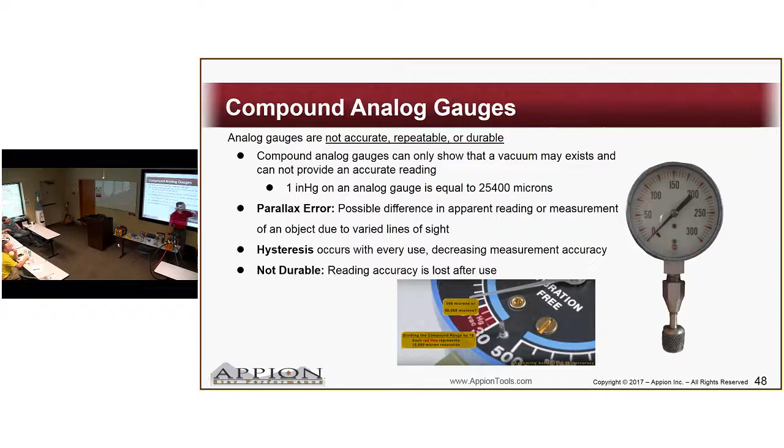Yeah, you can just zero it out. Do you actually know that that zero-out method is actually just a wobble screw? If you calibrate it to zero, you've actually just not measuring anything anymore. You're supposed to calibrate with a dead weight. There's all sorts of things, we can get into that way too much. So we just say the analog gauge does not have the accuracy, the precision, to be able to tell when your vacuum is done or anything else.

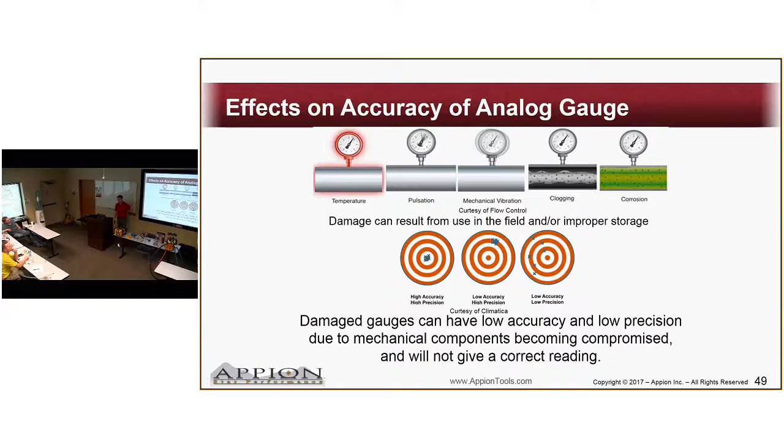So as a conclusion now, guys, we're almost done. Have you ever heard you can pull a vacuum and it should take an hour? Right, we've all heard that one. That's using time, and using time as a vacuum is not a vacuum gauge. You will not know when your vacuum is done.

Have you guys heard about the pitch change? That's actually when you go from degas to dehydration. If you stop when you hear a pitch change, you're usually stopping it at the most important part of any vacuum pump process.

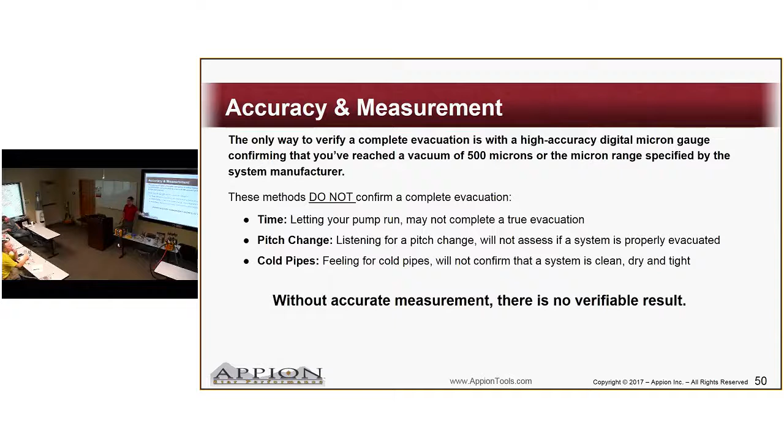And you guys know beer can cold? Beer can cold is a bad method for charging, but some people use it for evacuation. We know the Joule effect makes the pipes feel cold, we've heard about holding silver bullet cans against it, we're from Colorado, we've heard that one a few times. The pipes will get colder as we evacuate, but that doesn't mean the evacuation is done. Without accurate measurement, it doesn't matter how fast or correctly we do it. If we don't measure it, we're not done properly.

All right, you guys have any questions? Questions? Anything?